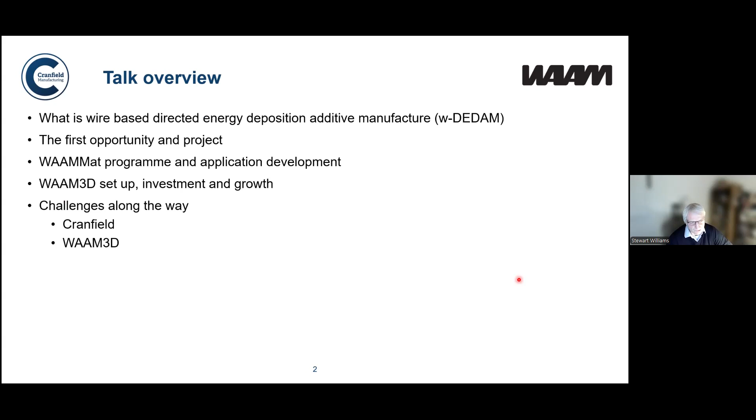Let me know if you can't see that. So, we're taking the technology from an idea to commercialisation, which we started back in 2006. I'll briefly introduce what this directed energy deposition additive manufacture is. It's a bit of a mouthful, but that's what the standards bodies have called it. A little about the first opportunity in the project, then how we put in place an industry program, an application program, then the setting up of the company and the challenges we faced.

When we started, the motivation was to replace or improve the existing manufacturing methods for metal structures. A lot of it, of course, is machining from billets or forgings, which is incredibly wasteful. In some applications it can be as much as buying 100 times more material than you're actually going to use in the application. Especially given these days, it's not only economically very bad for the industry, it's also not very sustainable.

Alternatively, we have some fabrication methods which have complex supply chains and skill shortages, and are rather hard to do. Similarly with casting, we have long lead times, the properties are not really as good as we would like, and we have fixed designs unless you need more tooling.

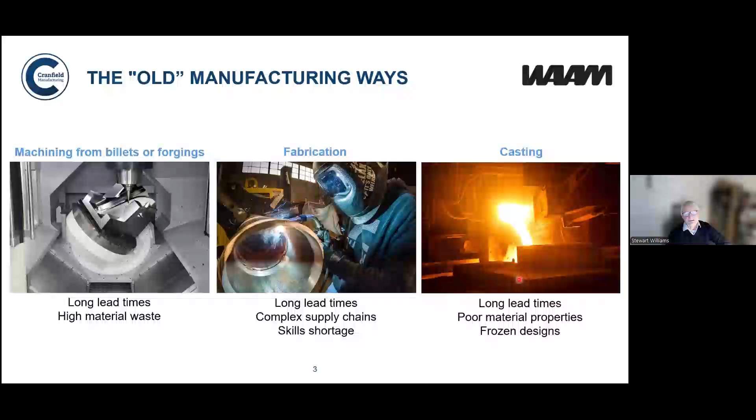So in essence, wire-based directed energy deposition is rather simple. Effectively, we take what you might consider a welding robot and power source, and we're using wire as a feedstock, and we build the structure up, in effect, what is weld metal. Actually, it's a bit different to weld metal because the thermal conditions are different. And then we program the robot to deposit it in layers.

As you can see in the video, this is a simple example that we did for ARA at Bedford. It's a wind tunnel model, which was to be made out of maraging steel, which is very difficult to machine. We built this using this 3D printing method, and we were able to make a hollow structure so that the sensors and so on could be put inside.

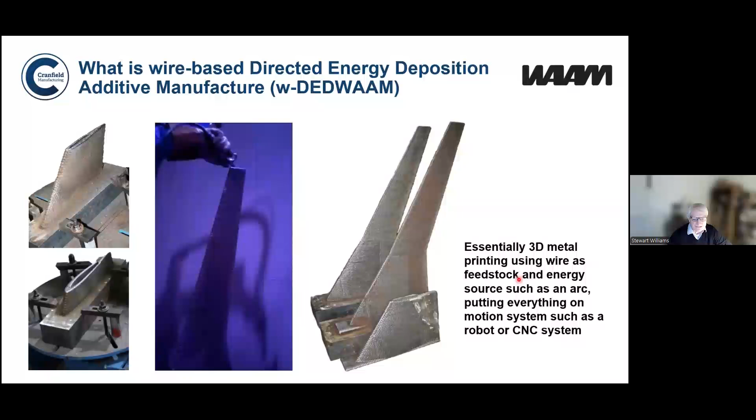So what is the motivation for this? When we started, the main motivation was just to reduce the cost of manufacturing, primarily through better material utilization. Typically we might achieve a cost saving of 70% compared to machining from solid, for materials like titanium, high value materials.

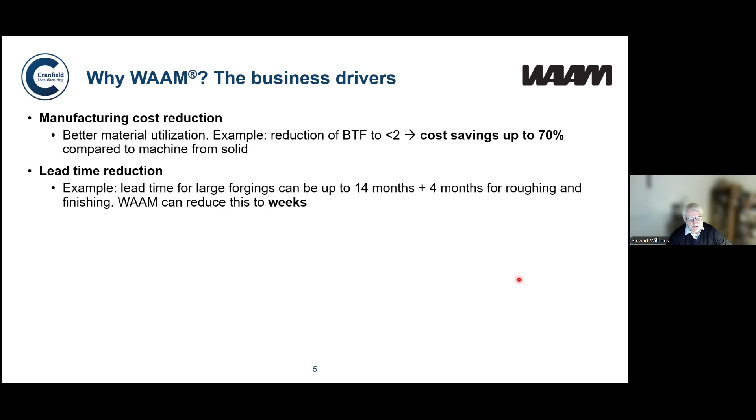The second aspect is about lead time reduction. Many aerospace parts are made from forgings, which can take maybe 14 months plus 4 months for machining and finishing. Using this 3D printing method, we can reduce this from many months or years to weeks. We also have the possibility of improving parts' properties using multi-materials, new designs and hybrid processes.

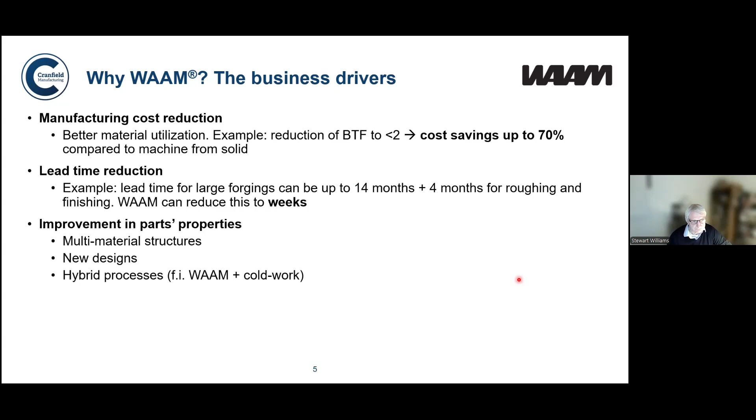Going back to when we started, my background is in aerospace manufacturing. If we look at the utilization of materials in aircraft structures, the 747 was 83% aluminium, but the 777 was 68% aluminium. By the time we got to the 787, almost half the aircraft was made out of fibre reinforced plastic.

There's an issue that aluminium is incompatible with carbon fibre composite due to corrosion, so they couldn't use aluminium where it was in contact with the composites. So our titanium amount in the aircraft had gone from 4% to 15%.

In a typical 787 at this time, around the early 2000s, there were roughly $20 million of forgings on the 787. And given that the cost of material was round about, and still is round about, $50 a kilo, if you're machining most of it away, this is a very expensive method.

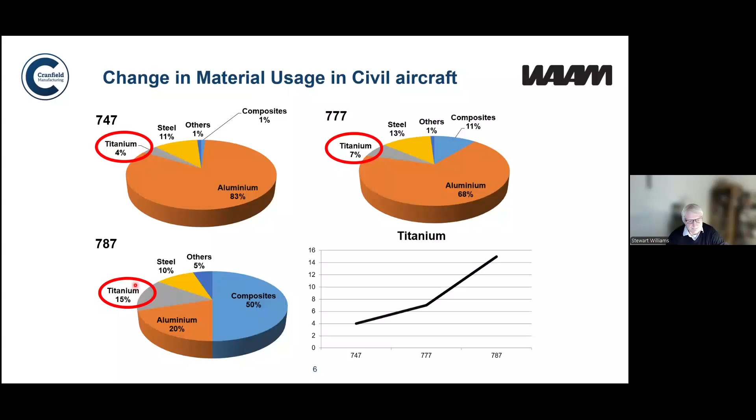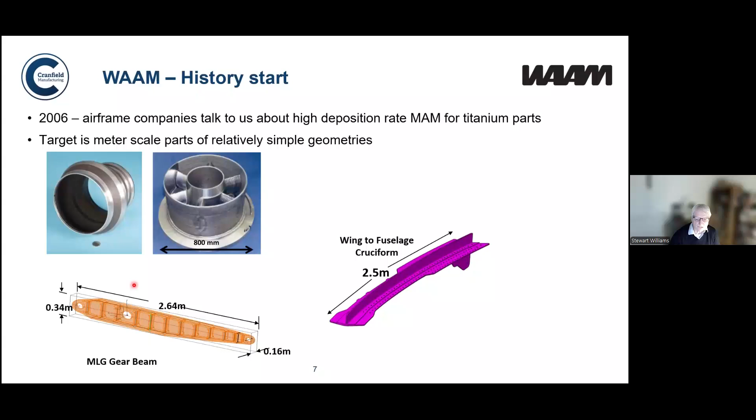So we set out to talk about whether we could develop a large-scale additive manufacturing process for manufacture of actually rather simple parts. We're not looking at complexity here from the additive manufacturing process. You can see some examples of the target applications that we had.

When we first started, we used a particular process. There are many variations in processes which I won't go into today. We built this first part in an afternoon, took 3.5 hours. It was deposited rather nicely, and we thought, well, this is pretty good.

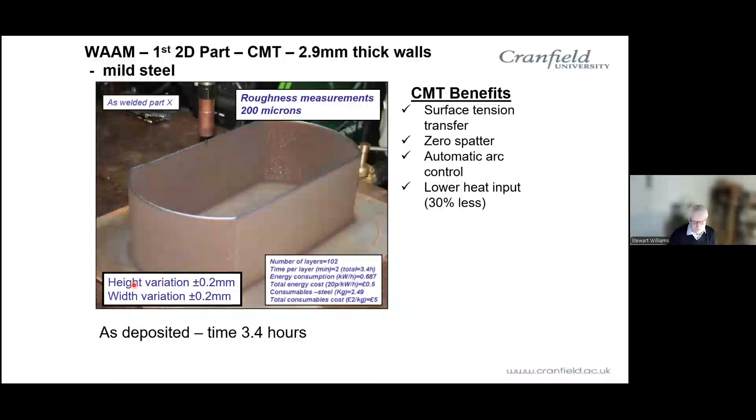Of course, it turned out to be much more complicated than we thought when we tried to make Class 1 engineering structures. So we spent a lot of time looking at the intricacies of the process for building complicated parts, looking at things like intersections and crossovers.

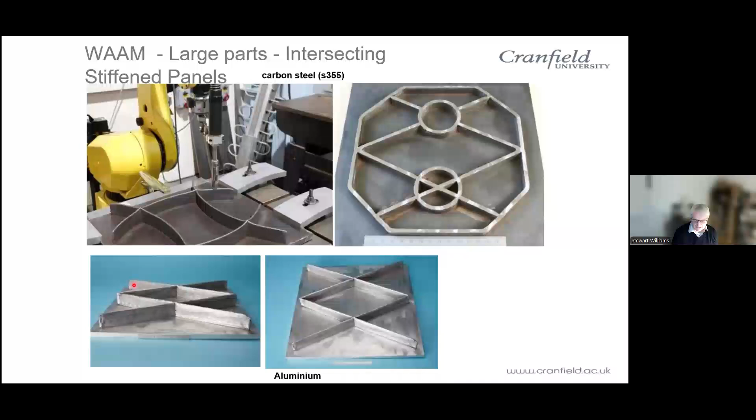It's not like machining, of course. In machining, if you go over the same area twice, it's not a problem. It certainly is a problem in additive manufacture because you'll have twice as much material as you need.

We looked at whether or not we always had to deposit vertically. So we investigated depositing at different angles and found we could actually build structures horizontally if needed, and therefore we could make enclosed sections.

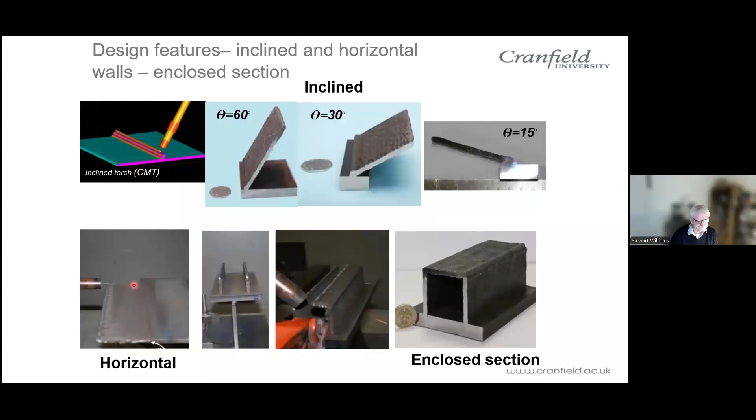This started in 2006. As was mentioned, my background is physics, not welding or metallurgy. So we spent a lot of time looking at the physics of the process and understanding it properly before attempting to make complicated parts, which was what, of course, all the industry partners were wanting.

This is the very first complicated part we made in steel. You can see it in the tool, and it was reasonably successful.

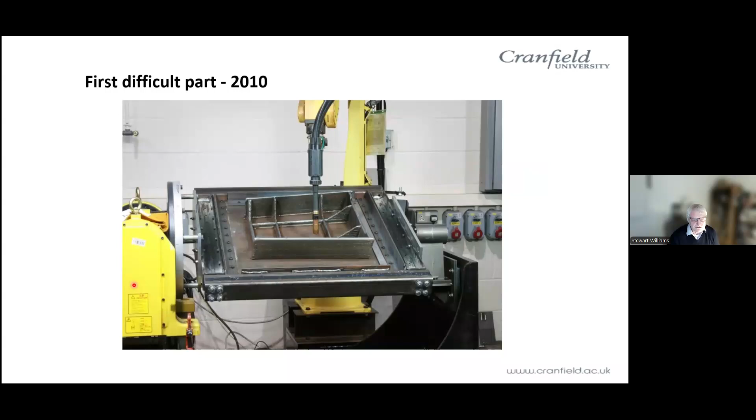Then when we moved that forward to titanium, we found lots of different problems. In particular, we had issues with cracking in certain areas. We had to work out how to deal with the intersection, how to manage corners better so we didn't get cracks and so on. So when you translate this rather simple concept of icing a cake with metal, it becomes much more difficult once you try and do anything useful.

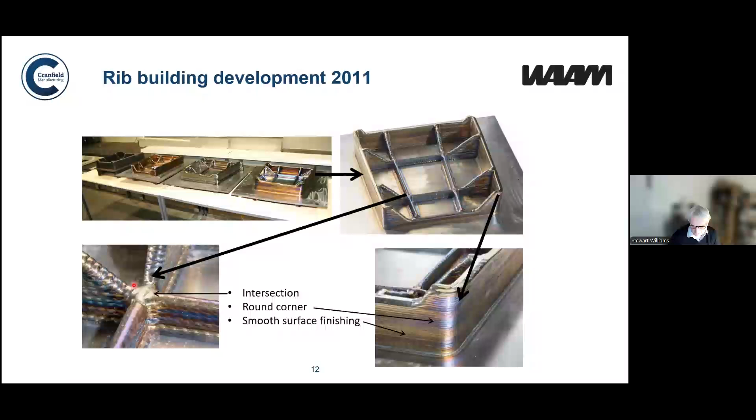However, we then went on to build many other parts. This is just a few examples here. The one on the left was a part we made for BAE Systems a long time ago now. The ones in the middle are large-scale turbine blades for GE. And the one on the right is an oil and gas part. It's quite a simple part, as you can see, which is just an Inconel transition section. But these are actually rather difficult to manufacture in practice.

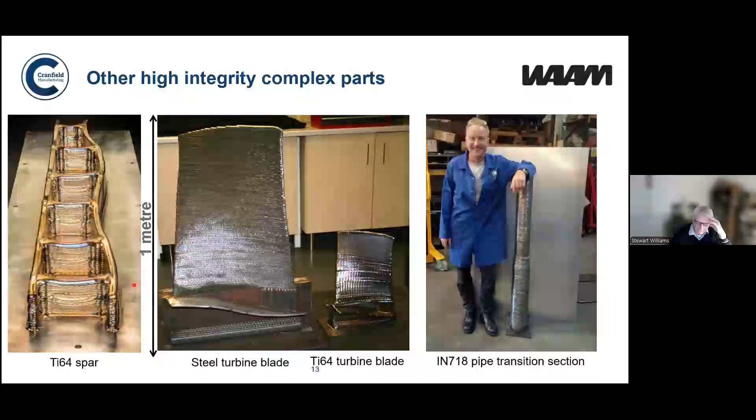In parallel with this, I haven't included it in this presentation. I'll answer the question now before it's asked later: in terms of material properties, we can get better than wrought material properties. We can introduce cold work to improve the properties, and also we have faster cooling rates than you get in forgings, for example, and more uniform structures.

So the industry partners were extremely interested, but of course this was all being done in the university laboratory. So when that program ran out, we collected all of the projects we had and put them together into a program, a rolling technology program, to mature the technology to TRL9 so that it could be adopted by industry.

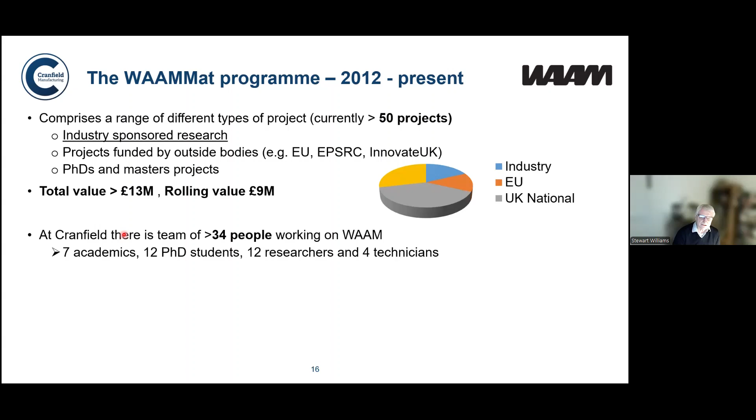Currently we have about 34 people working on this technology at Cranfield, a mixture of academics, PhD students, researchers, and so on. Because we can't do it all, we have academic partner universities working on materials and performance and in-process NDT, various other topics that aren't our speciality, but we brought them all together into the program.

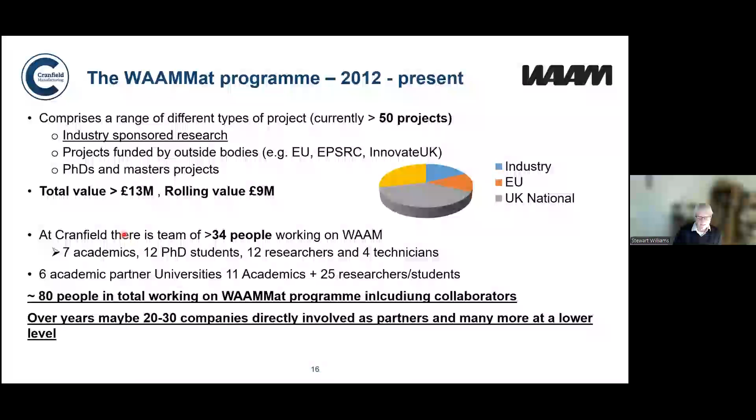So at the moment we have probably about 80 people in the UK working on the technology. And over the years, we've had maybe 20 to 30 companies directly involved, and many more at a lower level.

You might think, okay, I just get my robot and welding power source and then deposit it and test the material properties. But if you really want to take a technology through to full commercialization, you have to address all aspects. So the technical program was rather broad. I split it down into system development, materials, and design tools.

Without going through the details, the critical aspect was the processes themselves. We have many different variants that we were developing with higher build rates and better fidelity, and how to control the shape is a critical aspect. Then there are other processes such as cold work, hybrid manufacture, integrated NDT, and so on.

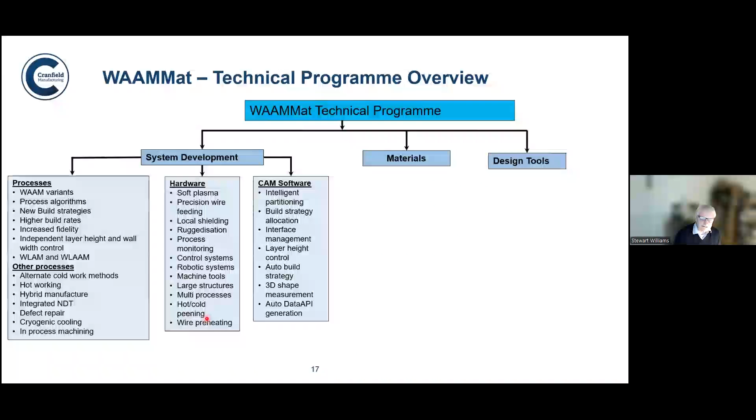We needed to develop a whole load of hardware. Welding equipment is not suitable for additive manufacture, really—it's only designed for doing short, low duty cycle work. We had to develop how to feed wire properly, introduce local shielding, process monitoring, looking at different platforms, wire preheating, and so on. Equally important, and probably more important now in the company, is the software development—this is about path planning, control software, simulation, management of the data, generation of process parameters, and so on.

Once we had all those, of course, we could then provide commercial systems and mature technology. But in reality, you need to, in parallel, develop the applications, which you do through working on materials. You can't imagine the number of materials we've worked on with this technology, ranging from aluminium lithium. Of course, the primary one was titanium, lots of aluminium alloys, nickel super alloys, low carbon steels, high performance steels.

And indeed refractory metals. We've done tungsten and tantalum, for example. These all need to be characterized in terms of a broad range of performance characteristics, and only by doing that can we get qualified materials that can actually be used. Then people needed to know how to use all this equipment and design for it. So we had a lot of design tools, CAD to CAM, knowledge expert systems, LCA tools, how to do tooling design, and so on.

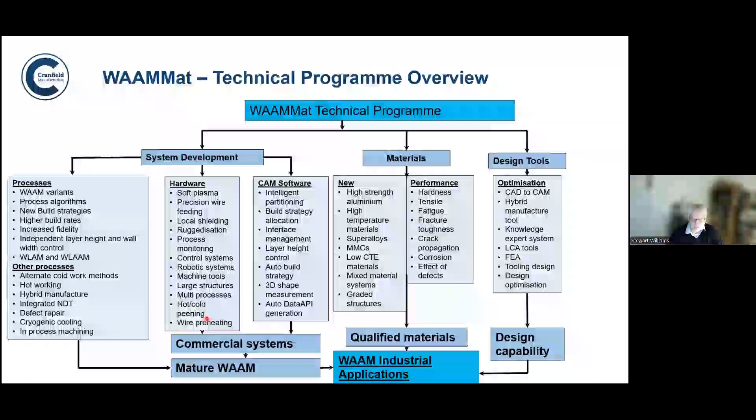So you need a big team, but only by doing all of those things can you achieve industrial applications, which is where we were always trying to get to.

In terms of the supply chain, we tried to partner with a range of different companies, such as system integrators, robotic companies, and so on, because we didn't really want to get into the business of manufacturing systems. But actually, it seemed to be impossible. So in the end, we just set our own company up, which is WAAM 3D.

These are the three founders: myself, Dr. Martina, who was going to be giving this lecture, and Dr. Jialuo Ding, who's the Chief Technology Officer. Both of them started with me as master's students, then PhD, through researchers and lecturers and so on, through to the company.

Just to say a little bit about the company and what it does. This is the timeline, actually. You can see this work was started in the 1990s. We then had this preliminary program, and then we started the maturation program, founding the company in 2018.

We got a Series A investment in 2019, actually right at the end. And then we started trading in January 2020, which of course wasn't the best time to start trading as a new company. And then we spent a lot of time growing the company from then until now over the last 5 years.

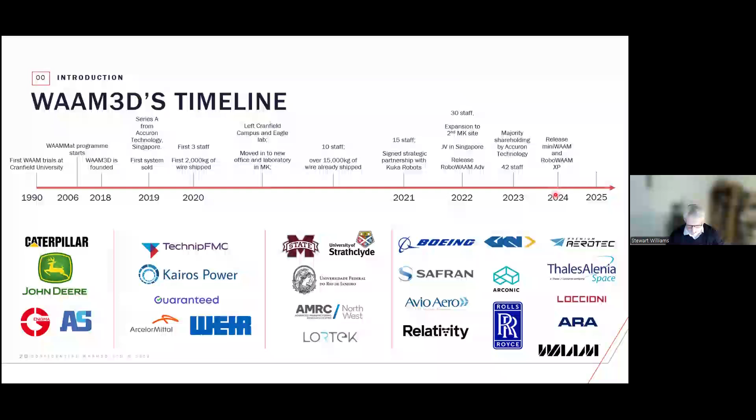To give you an idea what the company does, it sort of matches the program I showed you earlier. So we have the hardware - this is the actual systems themselves, and we have 3 or 4 variants of this now. And then all the software: we have a large software team for path planning, for allocation and management of process conditions, simulation, and the in-process control. And also we provide specialist high quality wires.

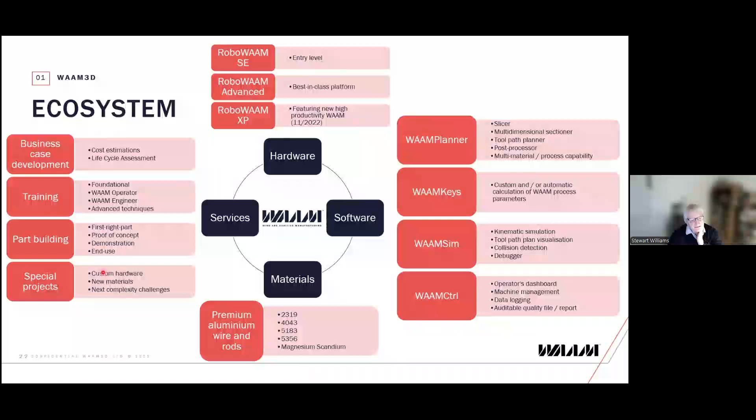And then we support the customers with business case development, training, how to manufacture parts and special projects. So we do have competitors who just provide this bit actually, but we believe that the customer needs all of this to be successful in their application.

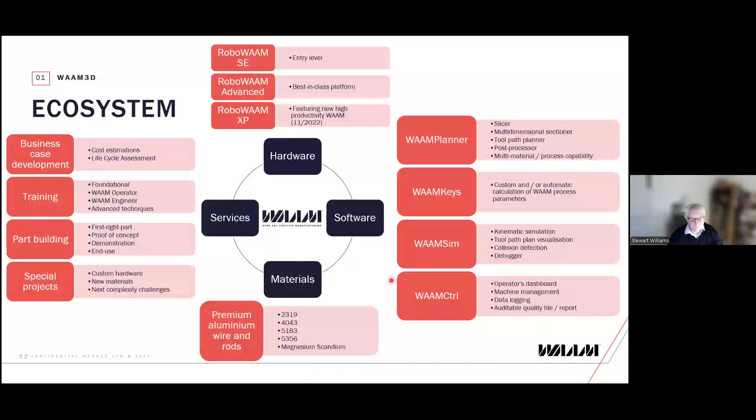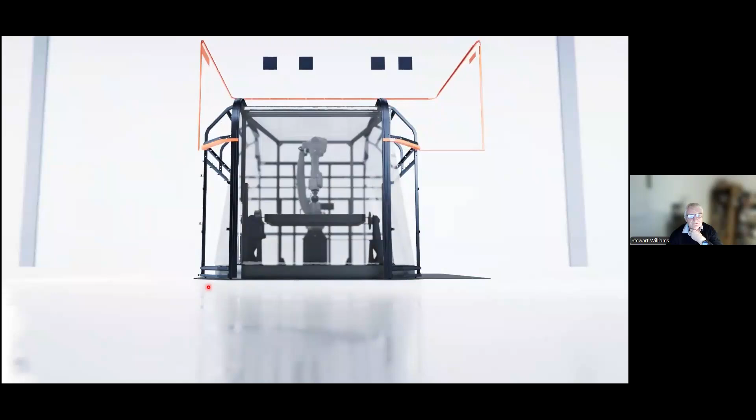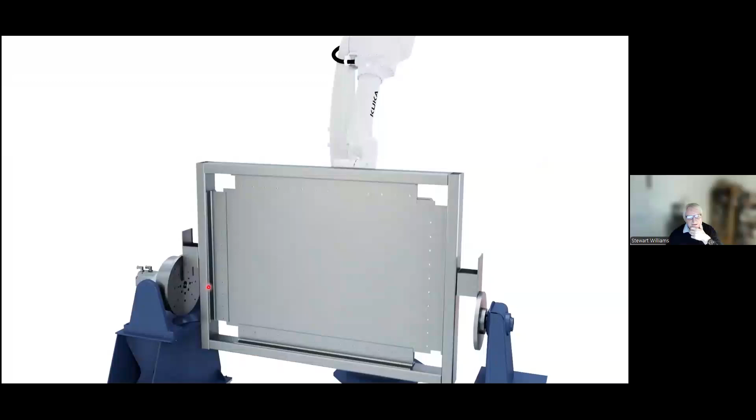To give you an idea what the commercial system looks like, this is the outside of our first product, and inside we have a protective environment and then a robot and a part manipulator. Take that off, you can see the robot, and we get to the heart of the system, which is a part manipulation system. And then the critical part, of course, is this end effector, which has various things in it - this is the torch and the wire feed system.

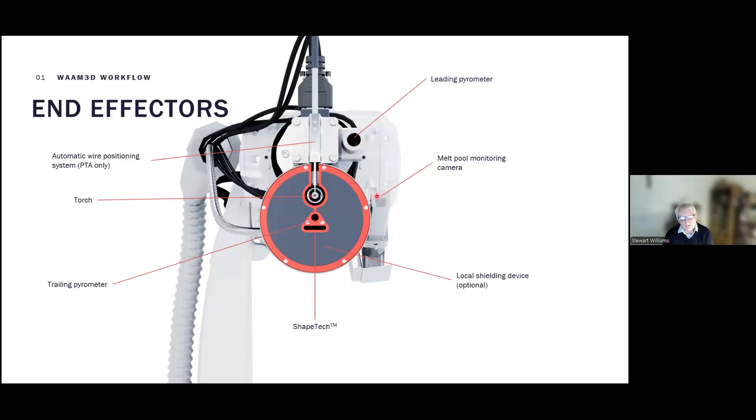This wire feed positioning is critical, so we have automated wire positioning. We measure the pre-deposition temperature and the post-deposition temperature. This is needed to ensure the microstructure and properties. We measure the shape, which is also essential, of course, to ensure that we have material everywhere we want it. We have a local shielding system, so that for building very large parts in reactive metals such as titanium, we do not need a very large enclosure. We have a camera for monitoring what's going on.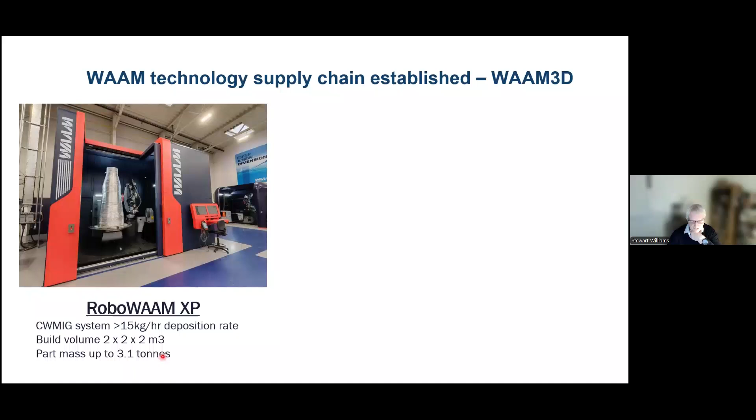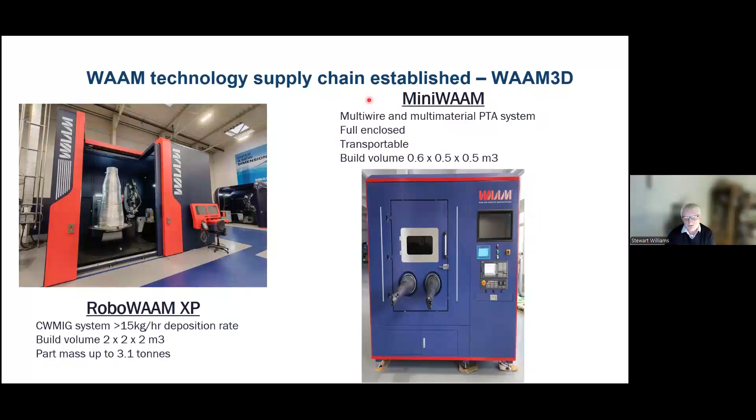This system is based on a much higher deposition rate process. With this system, we're depositing 15 kilograms per hour, and we can build parts up to 3.1 tons. At the other end of the scale, we have what we call a mini WAAM - not so mini actually. The build volume is 0.6 by 0.5 by 0.5, but it's transportable, fully enclosed, and primarily focused on materials development and research, with multi-wire and multi-material capabilities.

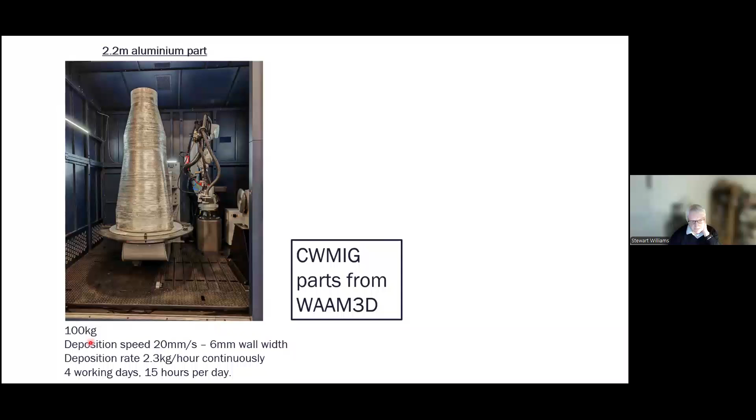Then looking at other industry sectors, this is the energy sector. This part here is 100 kilos, and we're able to build that in less than a day.

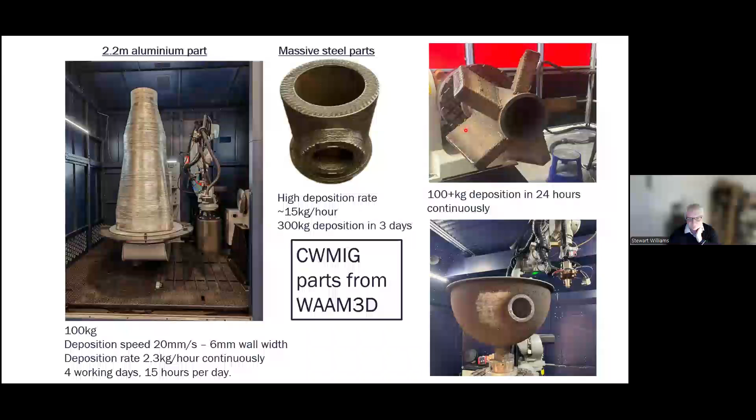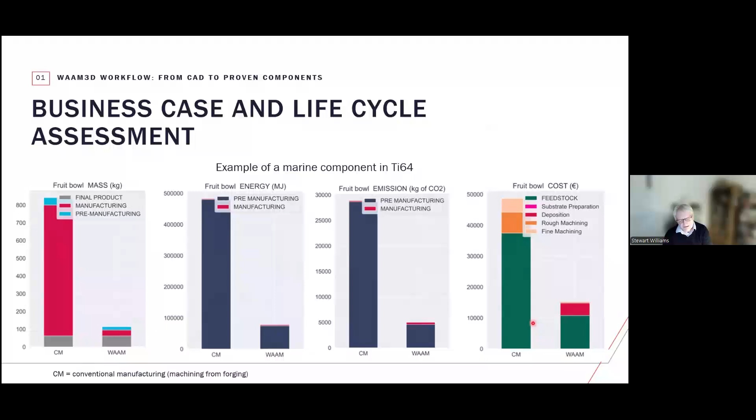On the software side, it includes business case and life cycle assessment, where we can compare conventional manufacturing with the WAAM process, both in terms of energy consumption, emissions, and cost. Our customers always need this information to be able to evaluate the business case.

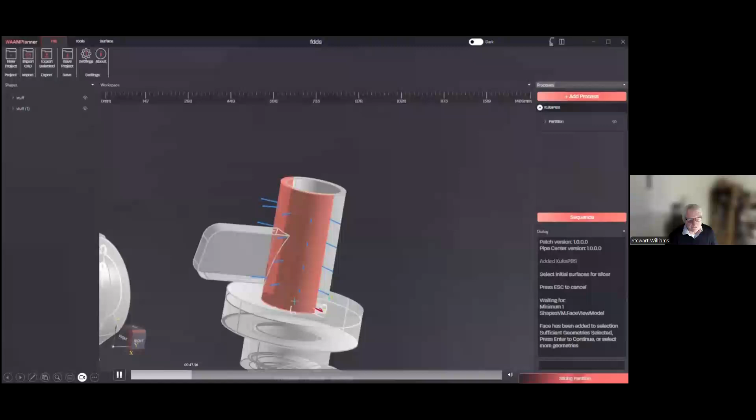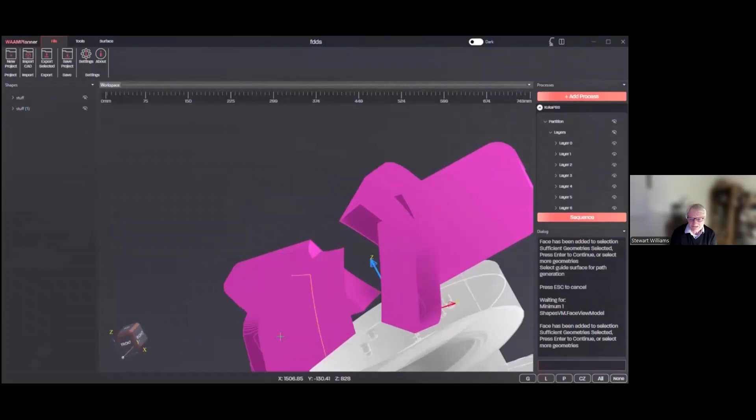This is path planning software. I'm not going to let this video run because I don't have time to go into the details. This is all about how to program the deposition path and the details around that. You need these tools to enable customers to design their own toolpaths. In this case, it's a multi-part on a curved surface - as you can imagine, this is not a trivial thing to plan.

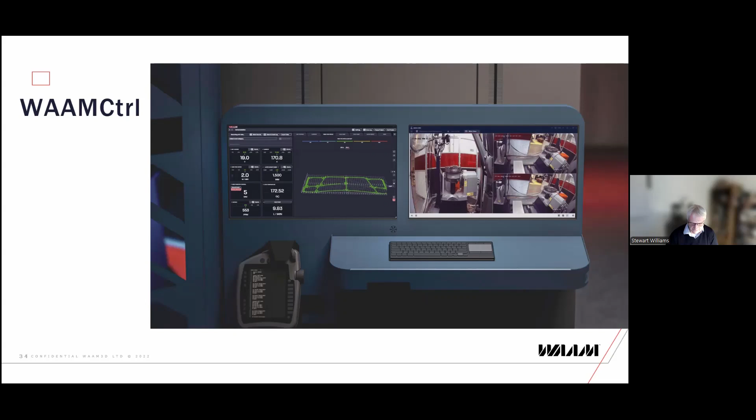On the control software side, we need much higher levels of control and monitoring for industrial applications. So we developed this control software, which you can see here, monitoring a lot of the process parameters - the wire position, the lead temperature, the oxygen level, and so on. We can set up response levels and user notifications for these different parameters, and if anything goes out of range, this is notified to the operator, and can be used for data logging in a digital passport.

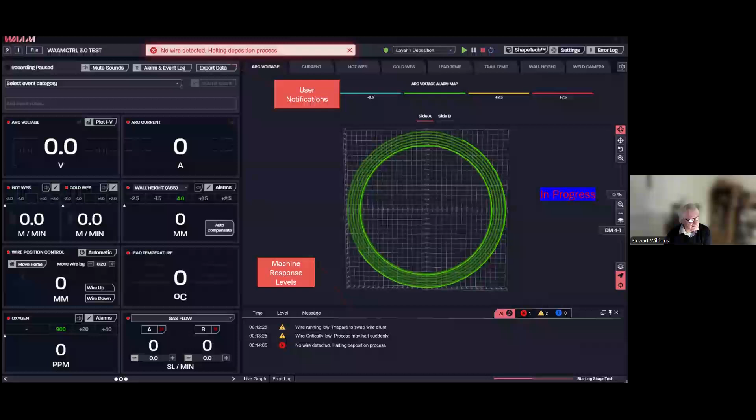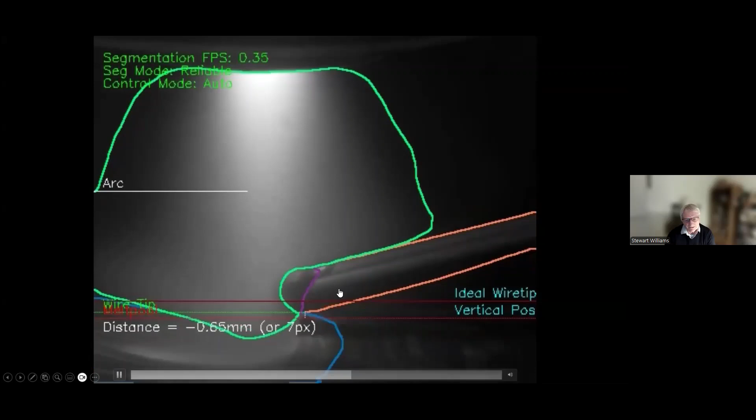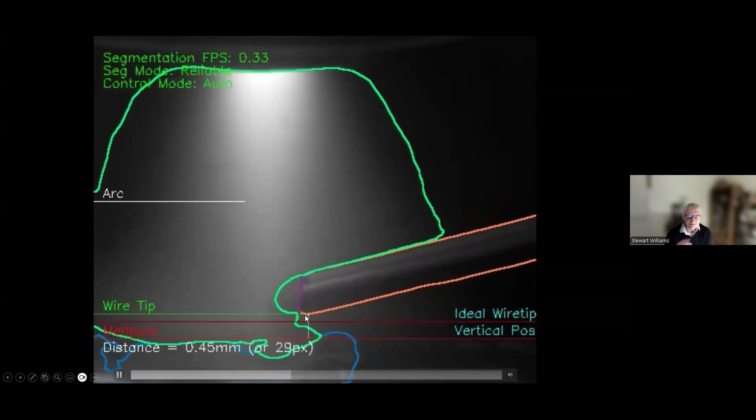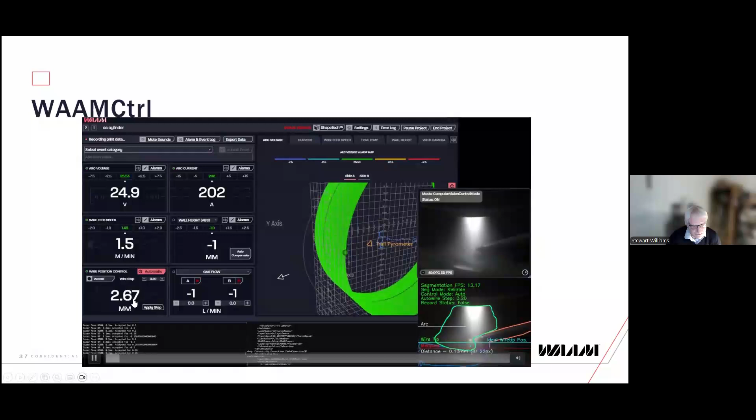Another example of something recently transferred from the university to the company: automated wire positioning. What you can see here is the gas metal torch, the arc, the wire - you can see the melted end of the wire and the melt pool. To keep a stable process, the separation between the wire and the melt pool is critical. So we're using AI segmented video, identifying the critical points and tracking those. This means we can adjust the wire position in real time, 15 frames per second, ensuring good quality deposition. You can see the wire position changing here - this is the wire position diagram, and this is the actual process. In this case we're using a dual wire process, with two wires being deposited simultaneously, and this is all logged around the build of the part.

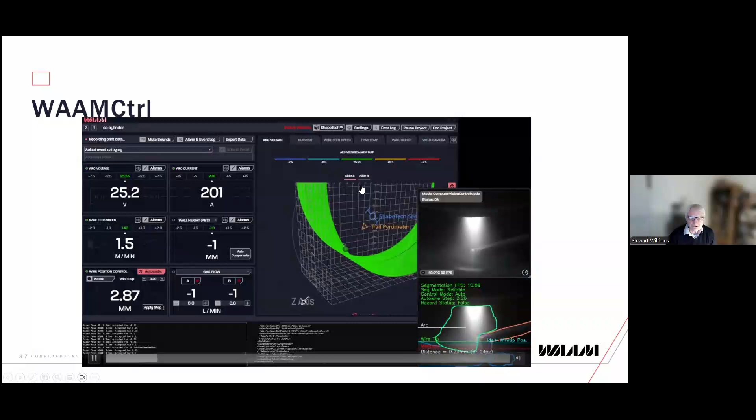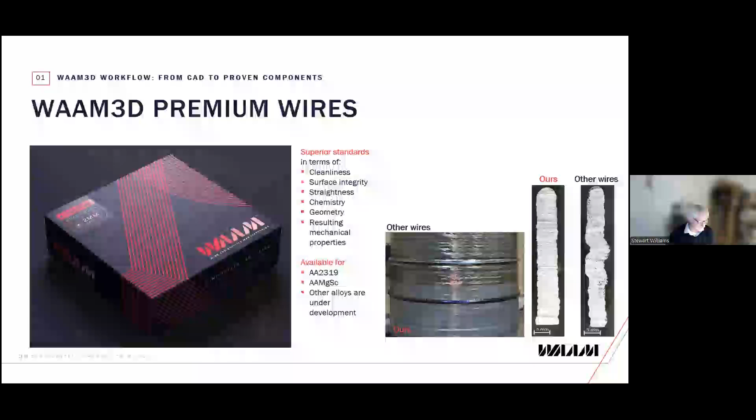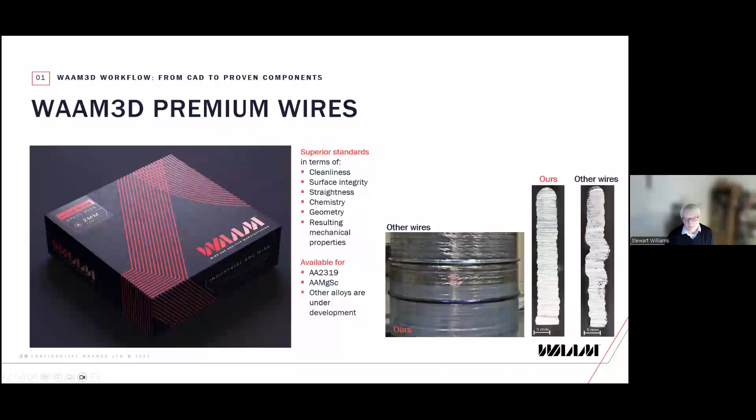We also had to develop a very specialized wire with much higher quality than standard welding wire. You can see this building a part, and we go from our nice wire to another wire - you can see the change in geometry and similarly the change in build quality. These wires nominally fit the specification, but actually the one on the right is not suitable for AM.

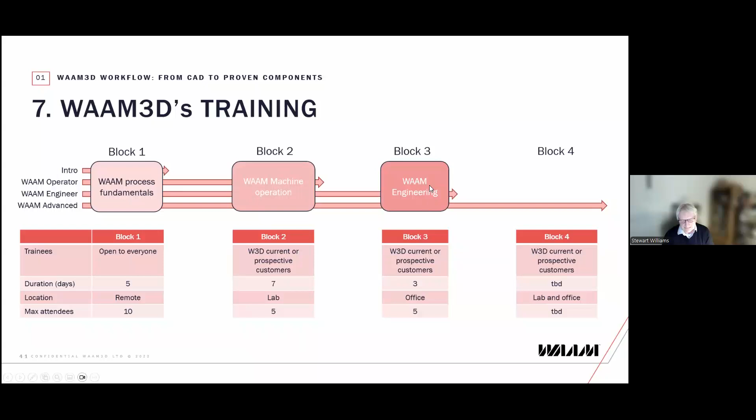Training is vital as well to enable customers to use the technology, and we can provide that at different levels - from the process fundamentals, to the operation of the machine, to WAAM engineering, which is basically how you build parts, and then specialized training as well for things like tooling design and so on.

Just looking at one or two applications. This is a pressure vessel for a satellite application. This gives 65% shorter lead time and 40% cheaper, using 200 kilograms less material. This is an example of where it normally would be made from a forging, but actually there's only 12 of them needed for the mission, so being able to do it by 3D printing is highly beneficial.

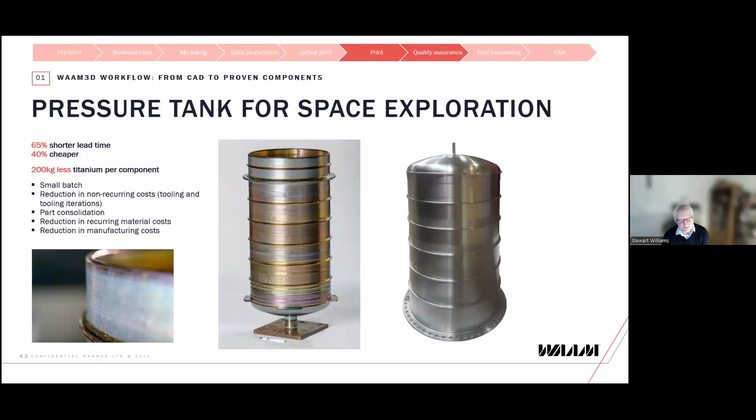This is an early example that we took through for qualification. This is a similar kind of thing - a satellite propellant tank, normally made from a forging this thick, around 35 millimeters thick.

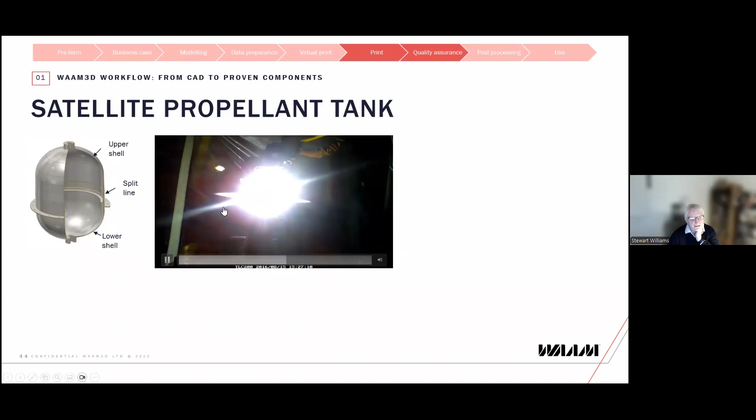What we're doing is producing a near net shape preform, and you can see the process here. We're operating in a tent with an argon environment for this particular case. This is plasma deposition. You can see the thick section here, and you'll see in a moment that we're going to build vertically, and you can see a bit more clearly what's going on.

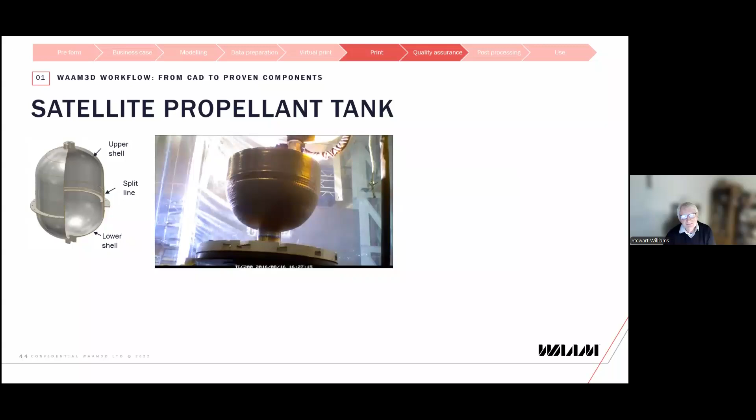And we're changing the process conditions as we go. It looks a bit like pottery, and it has many of the same characteristics, but it's a bit more difficult with liquid metal.

So we then needed to test it, so we get it machined. This is an X-ray CT image of the part - there are no defects in it. It was then tested and compared to the forged part and performed identically, even as far as being tested to failure, and the failure mode was identical to the forging.

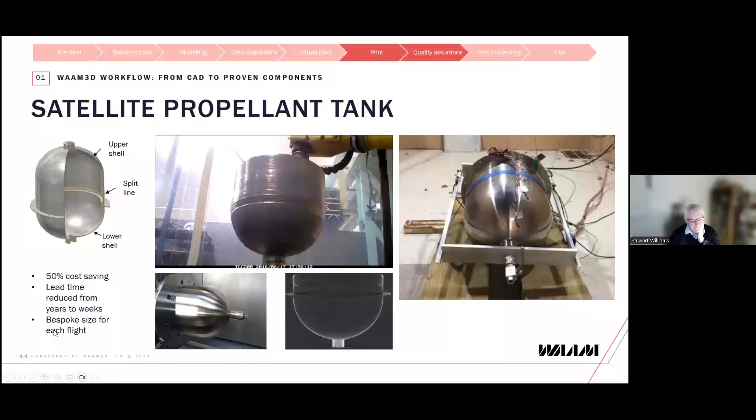So this gives us a 50% cost saving, the lead time reduced from years to weeks, and we can have a specific size of tank for each flight instead of the predetermined ones based around tooling.

This was a very large part we did for BAE Systems - the Eurofighter Typhoon rear frame that supports the engines. This is roughly 2.5 meters across, and again is normally made from a massive titanium forging.

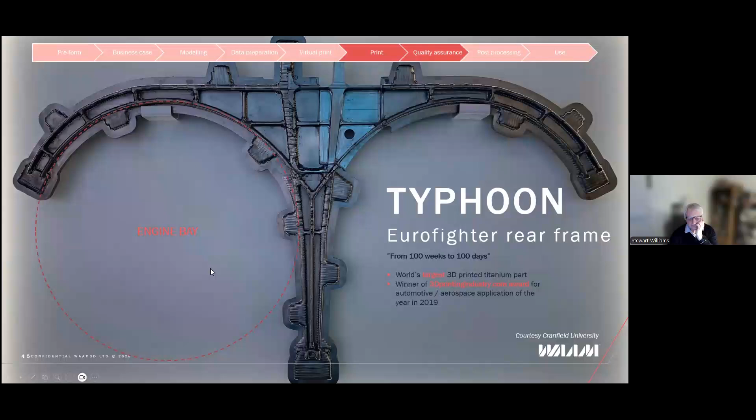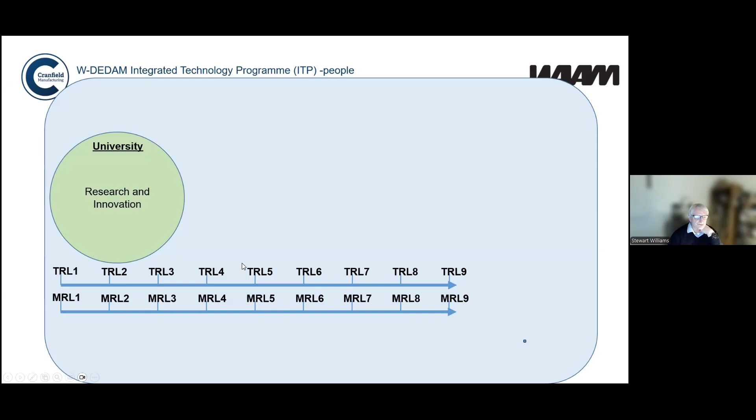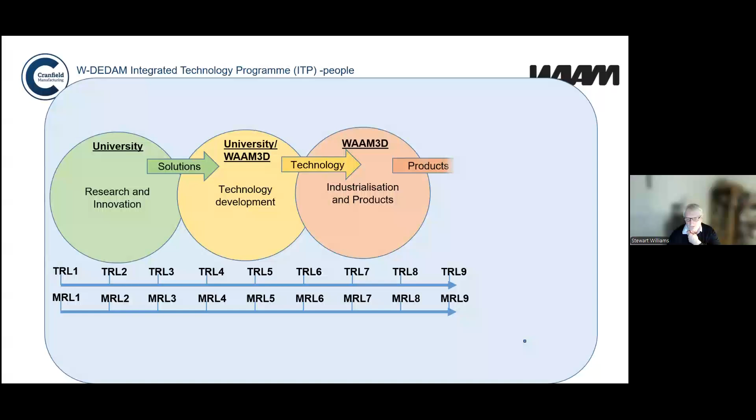So we now benefit between the university and the company by running what I call an integrated technology program. We have at the bottom here the TRL levels and the MRL levels, and the university operates in this space down here, carrying out research and innovation. We then develop solutions which we partner with the company to do the technology development needed to get this more mature, both in terms of the technology and the manufacturing readiness. Then it can be taken forward by the company to industrialization of products, and then provided to the customers, and we get the feedback from the customers about the requirements.

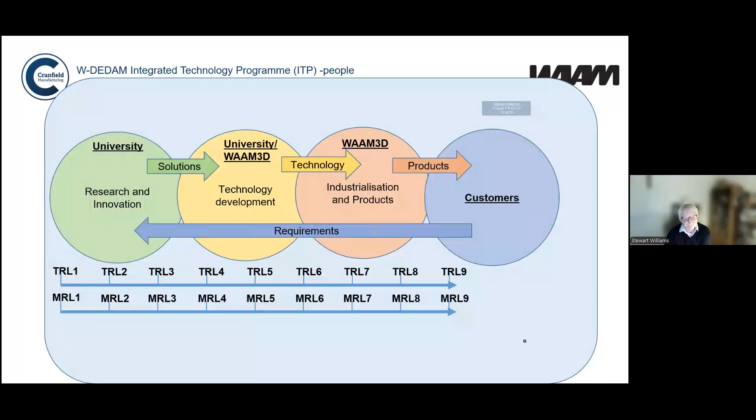Actually this model is very popular with industry, because we have many projects now based both in the university and the company, whereby they're developing specific applications here. We may be developing materials and properties and microstructure and so on, and they can get this very quickly. It's just showing the people involved.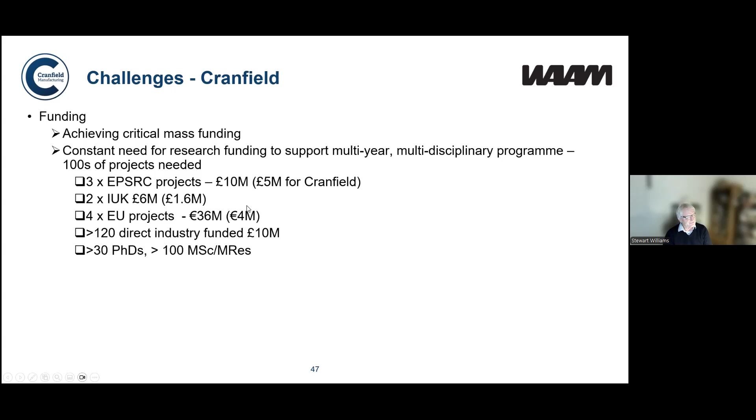So in terms of the challenges at the university, getting the critical mass funding is of course the main challenge, and there's a constant need for research funding to support the multi-year multidisciplinary program. There's literally been hundreds of projects - for example, we've had three EPSRC programs, 2 Innovate UK, 4 EU, and many industry funded projects, all supported by 30 PhDs and 100 or so masters and research projects. Overall, we've had probably 20 to 30 million to support the development of this technology.

And then in terms of people, getting enough good ones is a real problem, as you might imagine. What we're doing is not trivial, so we really need high quality people, and I must point out that we virtually have none from the UK - it is a major problem. And actually the university environment doesn't really encourage team working within a team - it's quite competitive. So setting up the whole centre to ensure the team is working to a common goal, which is not so common in the university, was something we needed to implement.

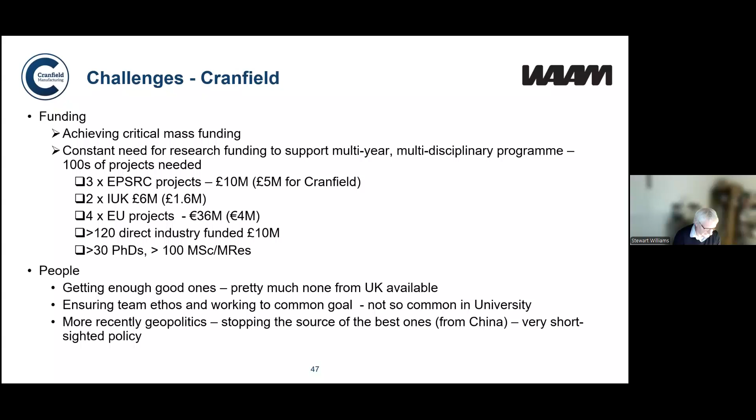And of course, more recently, we've now got the introduction of some significant geopolitical issues from our perspective, because most of the best engineers, not all, have so far come from China, and now we can't get them. So the result is that we can't do the work, and in fact we've tried to implement projects with people from China, and actually they've ended up just doing them in China anyway.

Another challenge is growing the facilities. So we started off with one system, we now have 12, but actually finding the resources to build up the facilities to support this number of projects is also a major issue. And then the ongoing continued maintenance and upgrade of these.

Balancing the academic and industry needs. There was a big industry drive, still is. We don't need to publish lots of papers, but it's more about doing the work with proper scientific and academic rigor, whilst keeping the industry partners sufficiently happy with the progress. We had a big range of industry sectors, often competitors within the same sector.

So we had to deliver this complex program with many stakeholders.

Looking at the company aspect, as with any startup, the major challenge is around cash flow and investment. There was a desire to grow the company, which is normal for a startup. It took us 18 months to get this two-stage Series A investment.

Accuron, our investors, are not venture capitalists at all. They're actually owned by the Singapore government, and they're used for acquiring technologies. They wanted to be the first to provide a combined additive-subtractive solution. They already do aerospace machining, and so they wanted to get involved in the best 3D printing technology.